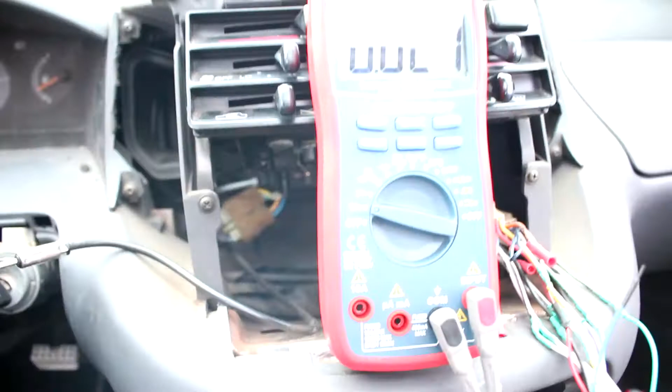Uh-oh. Look at that, voltage is still there. Okay, so I'm gonna have to go to the relays next, pull up the wiring diagrams, and we'll continue from there. Here we go.

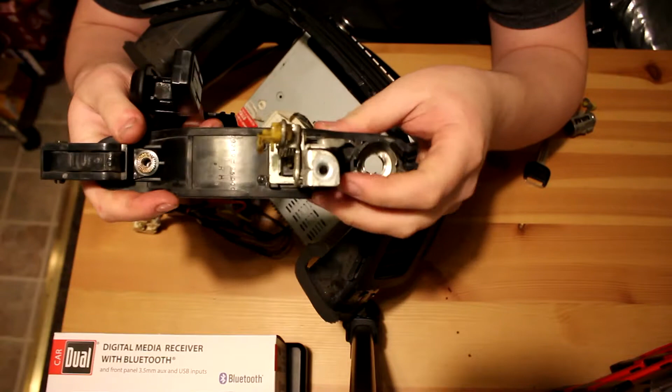So this one feels much, much better, but the problem is it doesn't fit the car. So I went ahead and pulled the new lock cylinder out of the new door handle, and I took apart the internals, watched a few Lock Picking Lawyer videos, kind of figured out how that works. I went ahead and picked the lock, the new one and the old one.

The old one kind of fell apart, but I pulled out all these pins and I've re-keyed the cylinder to the key. So now the key actually turns the cylinders. This will be a fully functional lock on the new door handle, which should be coming tomorrow. So I'll have an update on that tomorrow.

So here is the stereo unit that I soldered up last time, and that was quite an adventure. I'm gonna have to redo all of this, so I'm just gonna go ahead and chop them all off and try again. I'm not gonna make you watch the video because that would take forever and be ridiculous.

Here we are at the spaceship. I'm gonna jump this thing, get the heat going in it, and we'll put this back in. Well, that's it, I did it. I will update you once we get the door handle and other such things.

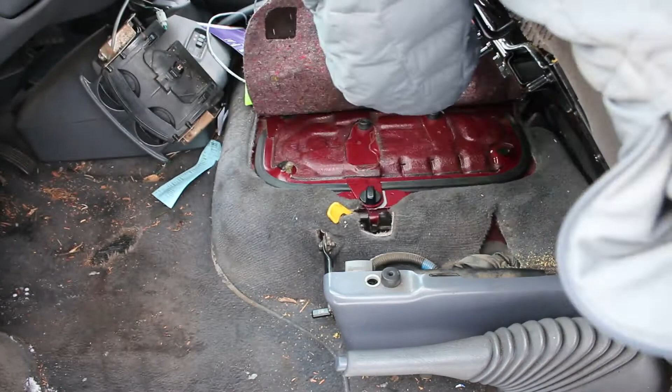Let's get focus right there. So this cable right here - you can see there's some slack on it right now. There should be no slack on that, it should be tight at all times. And as we pull the throttle cable, that should also move. So I'm gonna go ahead and pull this out.

And I'm gonna get some lube and we'll shoot it down there and see what happens. All right, so I've been at this for about, I don't know, 7-10 minutes now, and this is where we're at. It's retained some of its spring, and I got some lube down there and flushed out a bunch of crud.

So it's still not perfect. I'm probably going to go for another 5 minutes and then hook it back up. But this should be significantly better than it was. So, all right, this is where we're at now. I'm going to go ahead and... let's see.

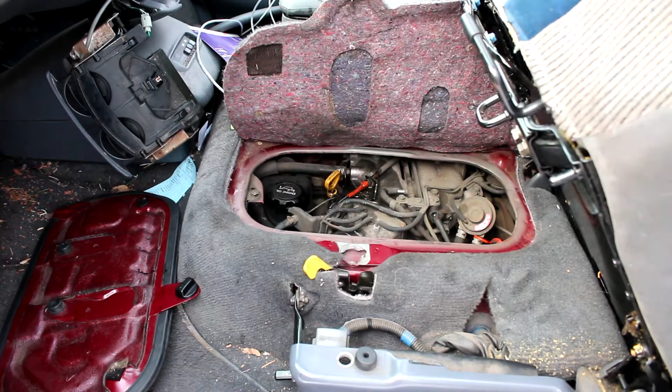So, the cable snaps back nice and quick. That's exactly what we needed it to do. I'm going to go ahead and wrap this up, and then we'll move on to the big issue of problem number 2.

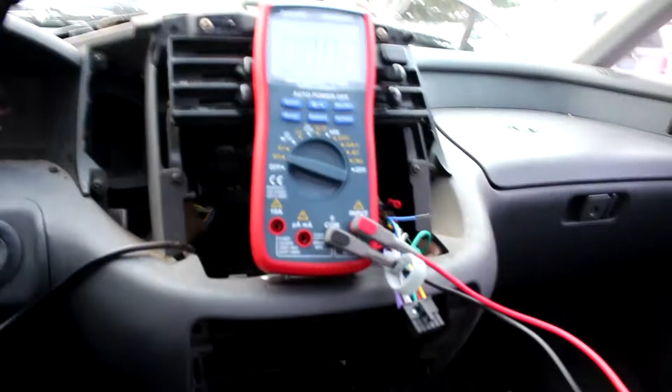Okay, so here we are in the car, and in the last video clip you watched me install the stereo, and that was interesting. The install went great, all the speakers worked, everything did what it was supposed to do, but we had a problem. After I shut the key off, the stereo stayed on. I thought, wow, that's kind of unusual.

So I started doing some thinking, and I have the diagram for the radio and the connectors and everything. I've seen on radios before where if you don't connect the ground right, the head unit will stay on, but this was doing this kind of weird power cycle thing. So I did some research, and here's what I wanted to show you.

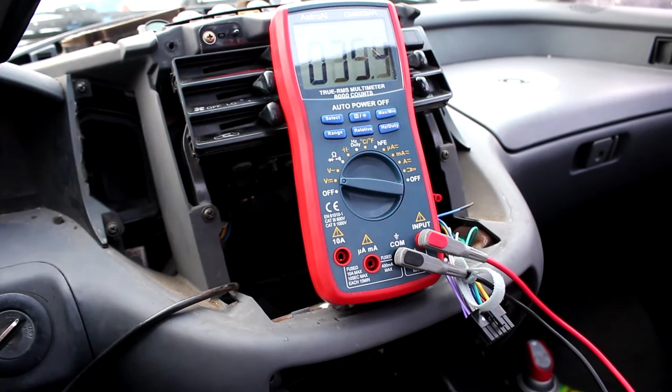Right now the car is running, and here's what we got. Let me set you up in a way that you'll be able to see this. Okay, that's going to be really dark, but I hope you can see.

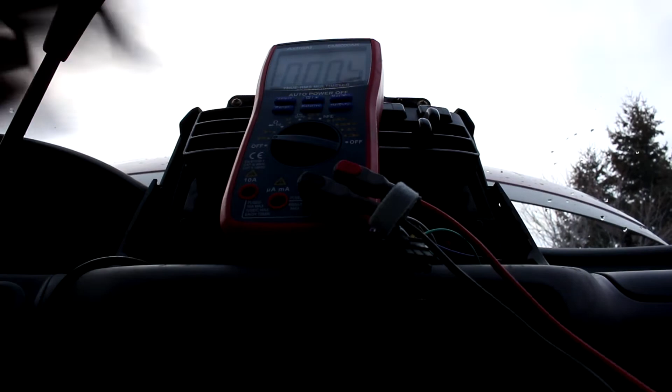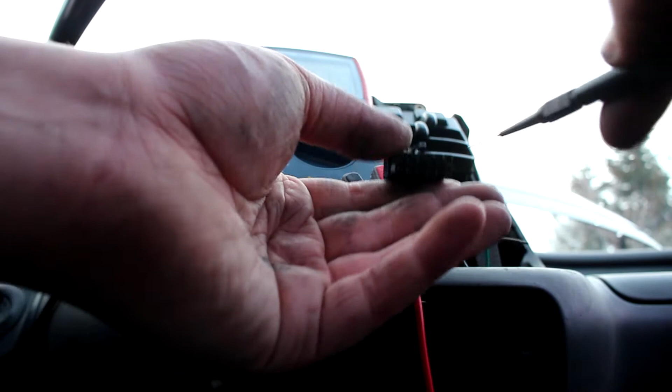So right here I've got the connector, we've got wires to the connector. I'm going to take my multimeter and set this up so that maybe you can see it, maybe you can't. I'd love to set this up right here. Okay, I'm going to put my black on the ground and my red on this yellow wire right here.

And we're reading 14.25 volts, which is excellent. That means the battery's charging. This battery has been really low, and there have been some issues, and it's just been sitting. So this is charging right now, which is why I've got the car running. So the black is our ground, and the yellow is our battery voltage, our system voltage.

The next pin is this red one here, and this is also system voltage. There's a 2-power system here. On the yellow wire, it's a constant 14 volts no matter if the car is running or not. Now this red wire is switched power. So when the car is running, the 12 volts is there telling the stereo to turn on, and when the car is not running, that 12 volts goes away.

So what happens is when the key shuts off, goes to the lock position, and is removed from the cylinder, the system voltage on the yellow wire stays there, and the system voltage on the red wire switches to 0.

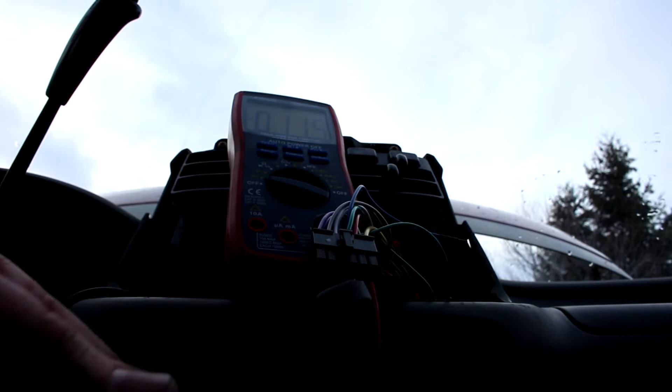So let's go ahead and test that. Let me grab my pins here, and I'll put my ground in, then my power in. Okay, we are currently reading 14.23 volts. So I'm going to shut this off.

Key is off. We're sitting at 0.625, 26, 27 volts. This will go all the way up to 0.667 volts on this red wire. I really hope you can see that—otherwise you'll just have to take my word for it.

So the problem is, that's just enough voltage to turn on the stereo. The stereo turns on, pulls this voltage down, then shuts off, but the voltage comes back. It's this whole looping cycle of the stereo kicking on and off, on and off. So we're back up to system voltage here.

So what I need to do is figure out a way to get this voltage to drop. What I did was back probe this red wire with the key off, and pull the voltage down through a test light, and that shut the stereo off.

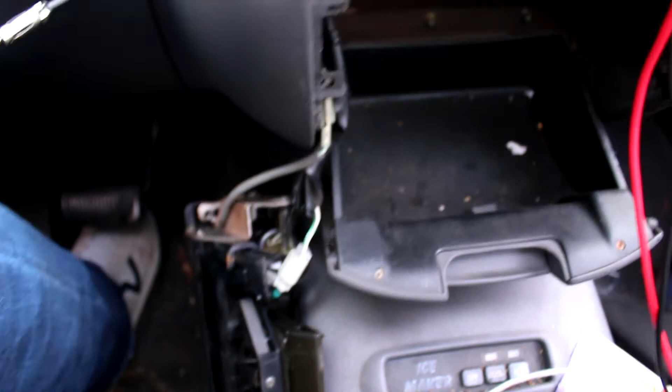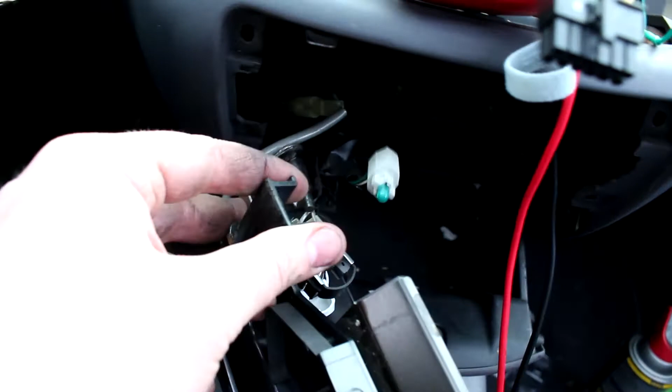So I got to thinking, well, what else is switched power? We have our cigarette lighter right down here, okay? Not this, but these connectors down here—one of those pins is switched power, and the other is a constant ground. This top pin right here is switched power. So I'm going to chase this wiring diagram, and I think what we're going to find—this is an assumption, we're going to have to prove this.

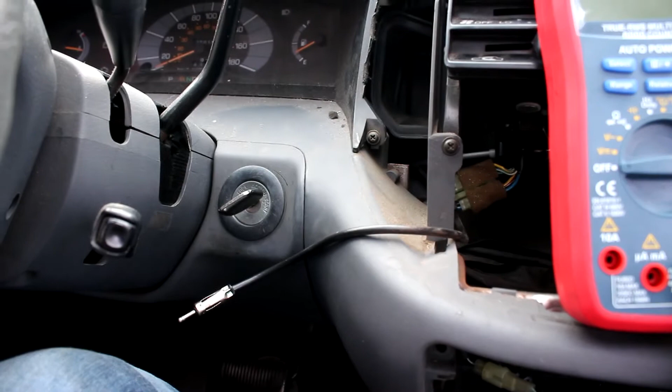My guess is that this ignition switch is not releasing the contact all the way, and we are receiving extra voltage on our system here. So the next step is going to be for me to pull this knee panel. It's really not that bad, there's some screws on the bottom and just some clips on the top. I'm going to go ahead and do that, and then I'll get back to you.

All right, so here's the plan. I am going to measure voltage here at this connector. I'm going to shut the key off, measure the voltage, and I have the column down here. It's pretty easy, just 2 screws, and you're going to pull down this under trim panel to get to this connector. This connector goes to a bunch of things, but most importantly it goes to this ignition switch. When I pull this connector, we're going to see if that voltage stays.

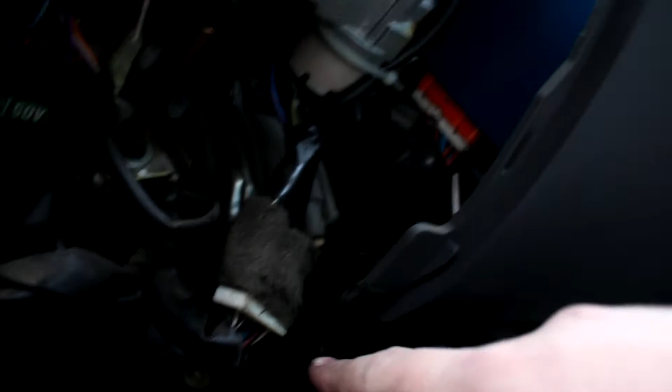If it does stay, the next thing we're going to go to is the relay that controls the system. We're going to see what's going on. I've got some wiring diagrams that I can look at after this. So we're going to pull that and we'll see what happens. I'll update you once we get there.

Uh-oh, look at that. Voltage is still there. So I'm going to have to go to the relays next, pull up the wiring diagrams, and we'll continue from there.

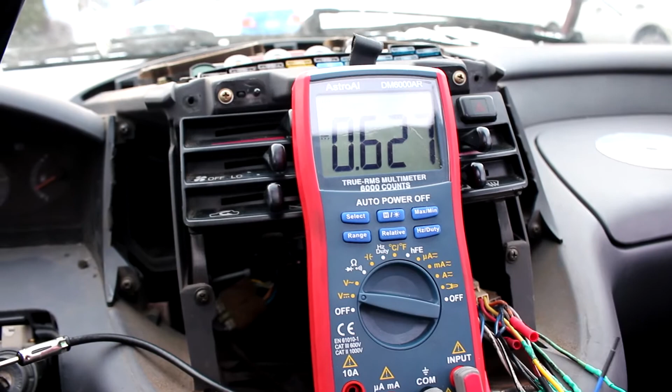Here we go. Here's what I've discovered. So we have one end of our meter on ground here, and we have our other lead here. So when we test this pin, we have 0.621.

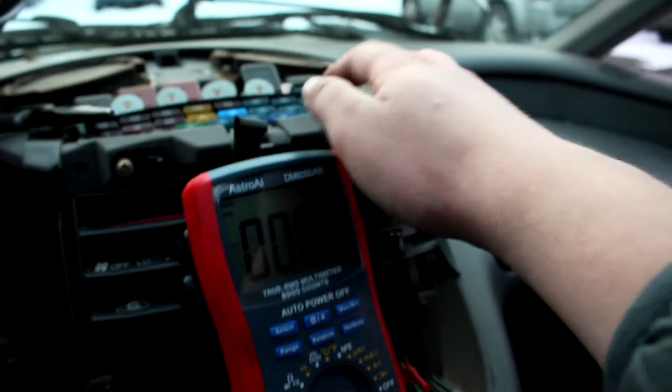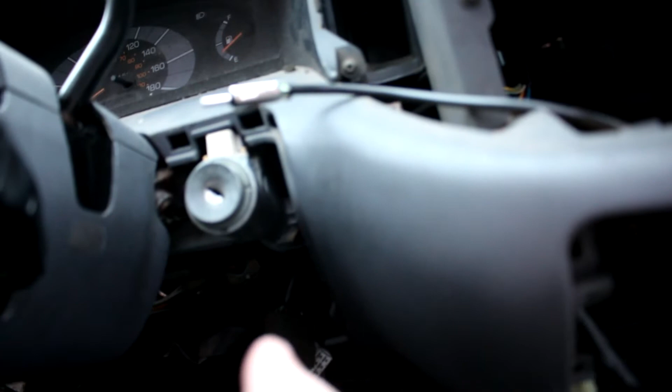So what's happening is this wire here, which is blue with red, I hope you can see this. This wire here, blue with red, powers up our 7.5 amp radio and our 15 amp cigarette lighter fuse. If I pull either of those, this is the cigarette lighter fuse here, and our 7.5 amp is right there. If I pull either of those, our draw goes to 0. But if I unplug our ignition switch, the draw does not go to 0, and I just showed you that.

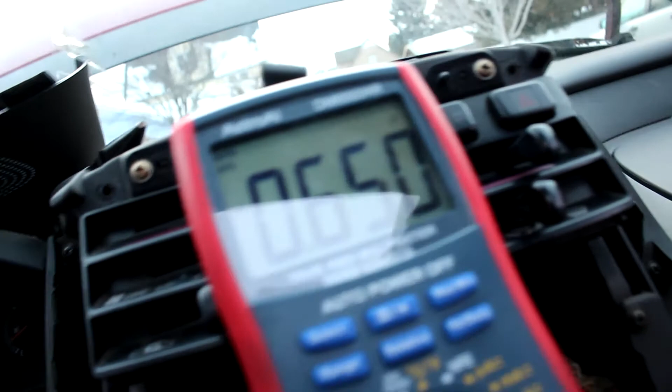So what I did was I checked this voltage. After unplugging our ignition switch, I checked the voltage on this blue with red wire, and if I go down there and find the pin, there's our draw. 0.650, 0.650. So what does that mean?

Well, what I need to do is figure out if this is the only feed for this wire. It should be, and if it is, my hypothesis is that somewhere along this line there is a short to power somewhere, or something is backfeeding the circuit. So I need to figure out exactly all what's on this, and in order to do that, I'm going to need to get access to the AllData. So I will do that, and we'll come back once we figure that out.

All right, so here's what I found. We're on the AllData here, and on this, which one is it? One of these diagrams. Maybe it's one of the ones I already got pulled up. Okay, so this is also from AllData.

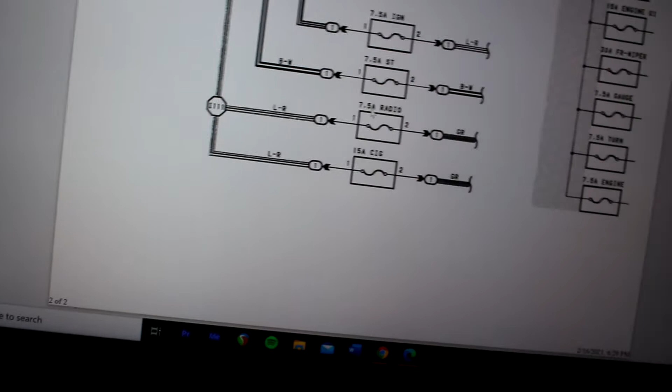This connector here, I'm looking for I111, which feeds the 7.5 amp radio fuse and the 15 amp cigarette lighter fuse. When I pull both of those, the voltage goes down to 0. So what I'm going to do is look for that connector. Now I went to AllData here, not that one, here, and I started looking at the connectors. Bam, here we go. So you can look here, and right here we have I111, which is way down there, and that is the closest looking connector that I can see.

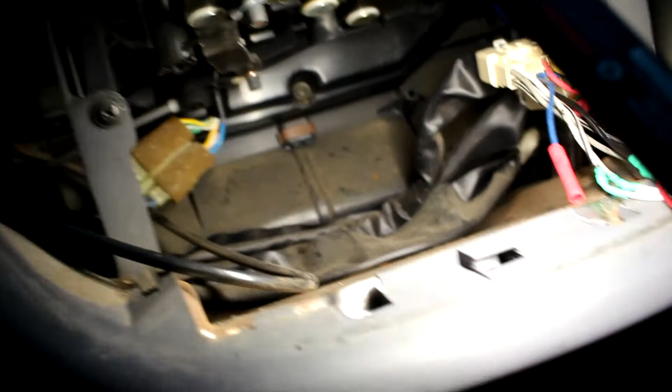So what I'm going to do is shine my light down into this hole here, and I'm going to follow this harness until we get to a connector. I'm going to split the circuit in half, and that should help us figure out where we're going, right? That's what Eric O says. He says split the circuit in half.

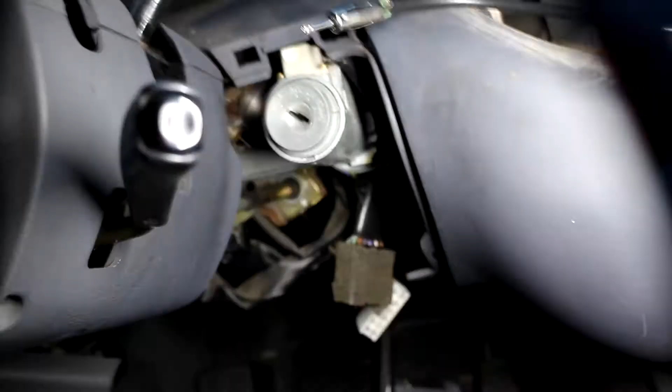So that's what I'm going to try to do. Somewhere between that white connector there and somewhere else in this system is feeding voltage. So let's figure that out.

I thought of a test I can do without pulling everything apart and losing my mind, because tracing down these harnesses is not as easy as I hoped it would be.

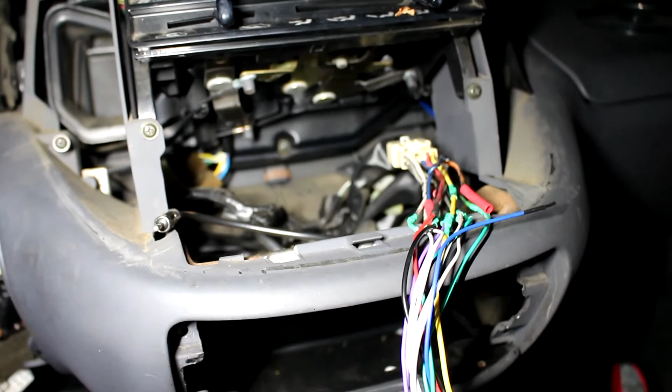So here's our fuse block up here for the inside, and there are two fuses that we can observe the draw on.

Let me grab my meter here. I'm gonna put this up here so you can see it, get everything set up for you. I gotta back probe the bottom here. Okay, so we've got a good ground.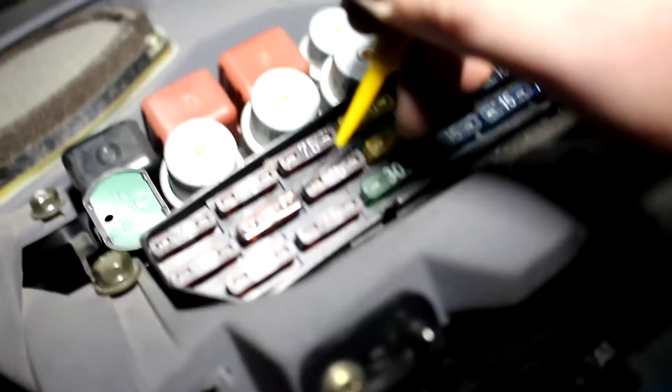So the first fuse right here that we can observe it on is this 7.5, which is the radio fuse. There it is on one side, there it is on the other side.

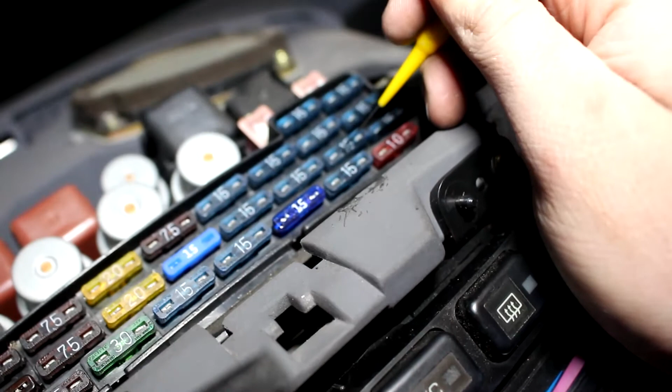Okay, the second fuse is this 15 amp cigarette lighter right here. There's one side, the draw is there. You're just gonna have to trust me. There's the other side, the draw is there.

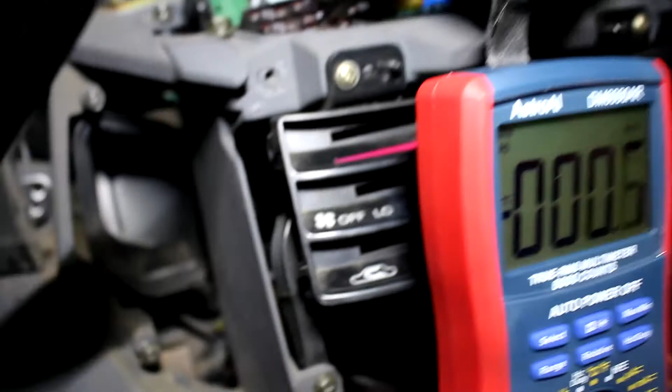Okay, here's a cool test. Let's pull the 7.5 amp stereo fuse and see what side of the fuse is still on. Here's the outgoing side, nothing. The ingoing side, aha, there's the draw. So we know the draw is on the right side of this fuse.

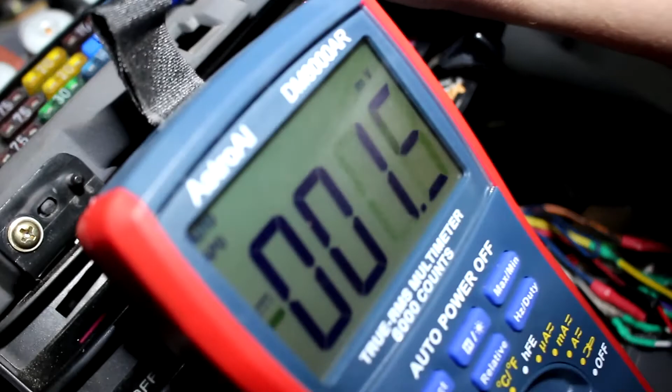Now, while leaving that pulled out, let's go over here to this 15 amp. We're gonna pull that. I'm gonna take my tester, let's test this side. There's the draw. No draw. No draw. Okay, so we know that on this side of the cigarette lighter is the draw, without a doubt.

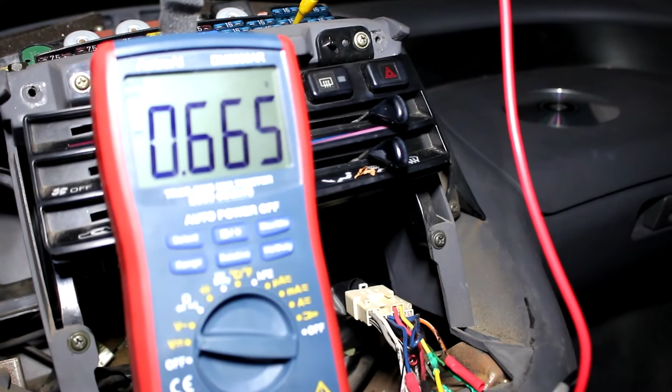So we know it's on this side of the fuse, so let's go to the diagram for the cigarette lighter. Okay, so the cigarette lighter shares this power from the blue with red wire at the ignition. So my guess is something is backfeeding from this cigarette lighter to this 7.5 amp.

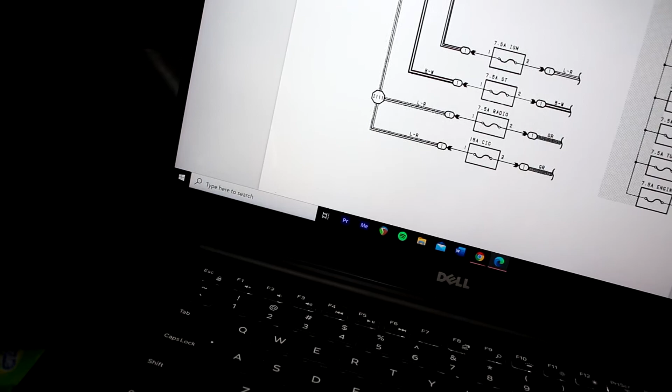We can test that by going down here to the connector, once I replace my ground. Okay, I'm gonna go back down here to this connector where we saw the draw originally. It's not there. And if I put that fuse back in, I'm gonna leave that pin there, put this fuse back in, and we just watch that draw come right back.

So that is excellent. So what does that mean? That means that between our block up here, so actually that means this: from here to the cigarette lighter, we are getting a voltage somewhere. So something in the cigarette lighter is backfeeding.

Check it out. So I've got the fuse pulled up there. We've got our draw up there, we know that for a fact. Now I've got my ground pin right there. I'm gonna take my probe here and stick this into the power side of this cigarette lighter. Uh-oh. 0.665 volts. So what does that tell us?

There is some sort of short between here and there. And we are getting an extra half a volt from somewhere.

So what are my options realistically? I would love to take that out, run a new wire down to there, bypass the whole thing, and call it a day. Now I could depin that and do that as a proof of concept. That would be a good idea. I would love to also follow this harness all the way back to wherever it comes from, but there is so much stuff.

I could not, for the life of me, through ALLDATA, find out the best place to split the circuit in half. So I pulled both of these fuses and checked, and one pin over here had the 0.667 or 0.7 volt draw on it when the car is running. So what that tells us is that it's not a power side issue. There is some sort of backfeed or short to power in the system somewhere.

So the next immediate spot that I went was down below. I back probed the wire, and it comes in on a blue with red. I'll show you on the wiring diagram. It comes in on a blue with red in the back, and it leaves on a white, which according to the wiring diagram is a green, but it's actually a white in this car.

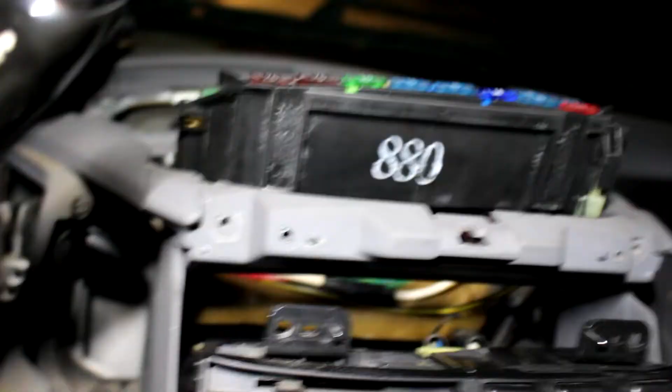So it leaves on the white and goes into this giant harness way back in there. You can kind of see it right in there, and it's a total pain in the butt to get to.

I followed that down, did a bunch of research, and did some more testing. I was thinking maybe I could just run a wire to the cigarette lighter to get that to work. Problem number one with that theory: there are other things on the circuit besides the cigarette lighter. I know this because I looked at the wiring diagrams, and there's some sort of airbag system on the circuit, and the power mirrors are also on the circuit.

So what did I do? I unplugged the switch and started taking a look at that. My multimeter just turned off. I started checking all those pins. I tested all of them and found the draw on this bottom pin right here, and I'll show that to you.

All right, so here's my connector. I'm gonna go ahead and put it in this bottom pin here. Come on, this is so hard to do one-handed. You YouTubers are talented. Okay, all right, so that's in.

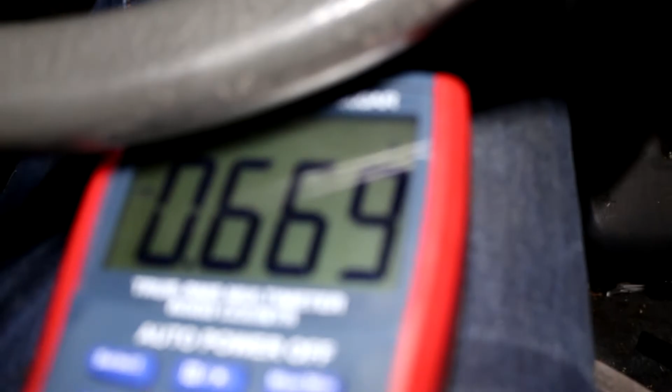And I'm missing my ground, of course, so I gotta get that back in over here. Pow, okay, here it is—0.669 right now with the car running.

So what's the next step? Well, our draw—sorry, I'm fiddling around with my ground here—our draw is up there and it's also down here. So what does that tell us? That tells us that somewhere in between those two points is our problem, okay?

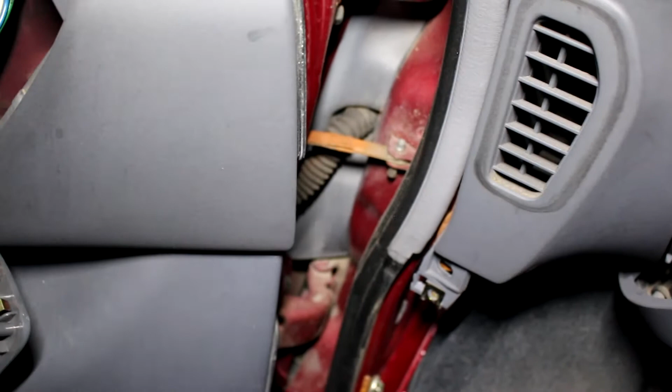So I'm trying to find a connector. I found a connector called BJ1, block junction 1 I think, but it is the connection that follows the door flex inside the car in this hole, and is right below this tweeter. To get to it you have to pull the ductwork, pull this trim panel, and pull this lower column, and there's two connectors down there.

Let me see if I can get you in here. Okay, come on. I'm seeing the unplugged connector—there it is. See that one that's plugged up right there? That is BJ1. And somewhere on there is a red with white wire that comes out of that.

So what does that tell us? I unplugged that connector and I'm going to show you something miraculous. All right, let me set up our draw up here. Okay, we're on the right wire there. I'm gonna take my ground and set the meter up here, and set my ground up right here.

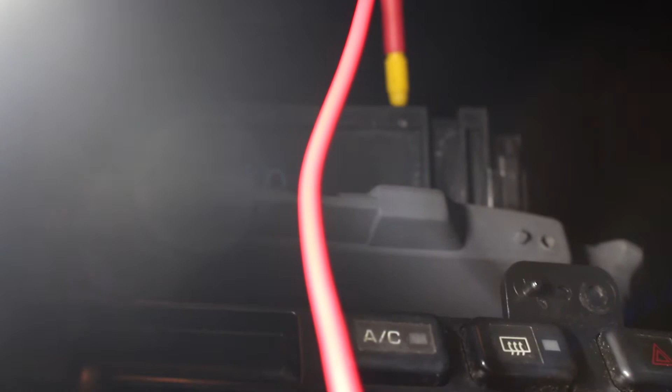Okay, here we are—0.669. Bam. Proof. There we go.

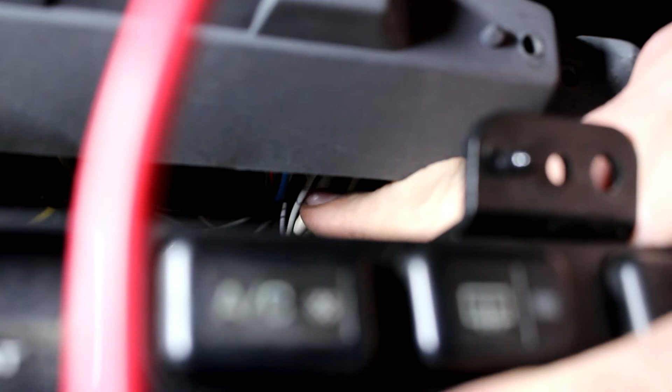So that is on this tiny little wire, right? Probably can't see it—right here. Boink, hello. So that wire comes out, goes into that huge mess, comes down and around.

So I came over here, and as soon as I started pulling all of this trim over here, I noticed something really interesting. Uh-oh, it's wet. Focus, come on, right here. Uh-oh, it's wet—see that?

I followed that up into here. I'm gonna point you at a place where you can see this, hopefully.

Sorry, this is... I don't work in Hollywood, I wish I did. Sometimes.

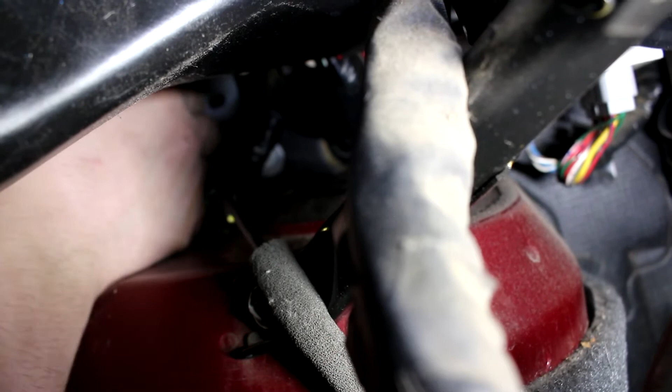Okay, let's get you so you can see it. Okay, you can see that connector right up there. I'm gonna squeeze my hand back up in here. There's a tab on the back, and you gotta push up a little bit to release the pressure, and pull that tab down.

Okay, there's our connector. We just lost dome lights, okay? We just lost the dome lights, but look at the meter—29 millivolts, 30 millivolts. That's acceptable.

I did it. Okay, so what does this mean? So there's the white wire coming in, and there is the red with white coming out. So you might think, oh, well, obviously the short is occurring over here.

So I put my meter on here. I will prove that to you. Here's my test lead, come on. Okay, here's my test. Okay, it's in the hole, it's in the pin. Here's my meter—20 millivolts, 30 millivolts. So there's no short here.

There's no short from that connector back. What does that mean? That means the short is inside that connector. That is crazy. And you know what's even worse? I don't see a single green crusty—I'm not seeing any issues at all.

Come on camera, adjust. Okay, hold on. Boop, it's too bright, let me dim my light here.

Yeah, you're not going to be able to see that. I hope you can. There is zero corrosion in that, but there is water in that connector, and that water is shorting out that connector.

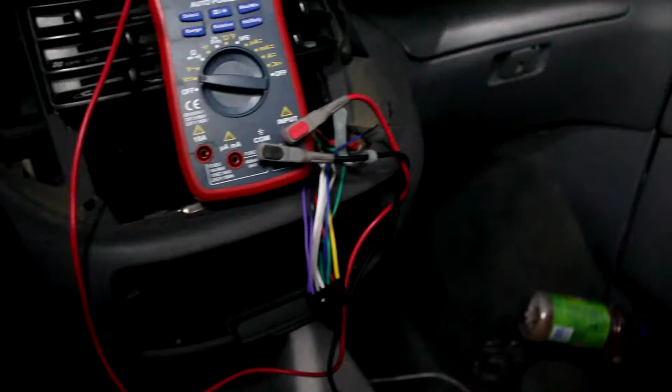All right, everybody, quick update. I was wrong, and I have never been so happy to be wrong. So here's what I was thinking: I thought green crusties in the connector. Uh-oh, not good, there's wetness down there, right? Well, I inspect, there's no green crusties. I brush everything out, clean it off, spray some fluid in there. Everything works pretty well, pin fitment seems really good.

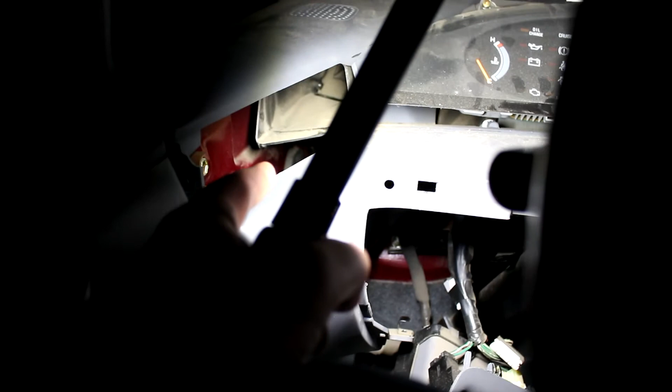Everything seems great, so I go check the diagrams again. I'm like, what in the world? I thought that was BJ1. Well, turns out I was wrong. That is, what do they call it, I4 or something like that.

So here, I lost my ground here. So let me go ahead and get my ground again. It's not the most reliable, but you know what, it's gonna work for this project, so, till I can buy a power probe extension.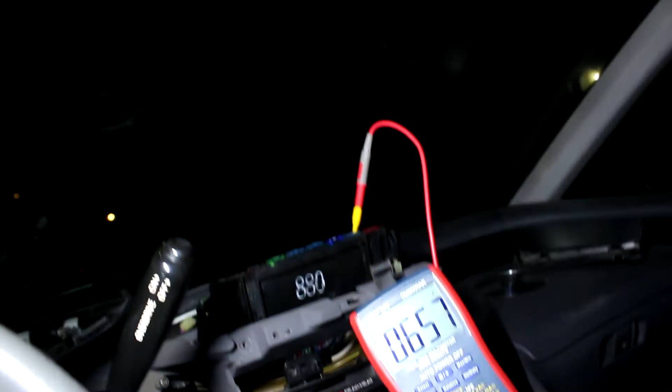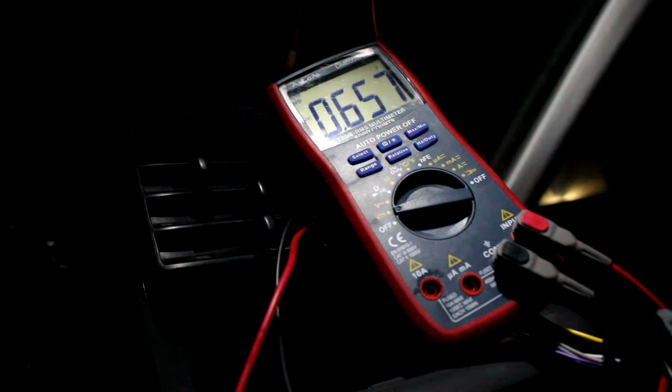Here it is, I'm gonna unplug this connector. Okay, you're good, you can see that, I hope. I'll kind of hold you there with my leg, the leg cam. And here goes the connector. Almost. Look at that. Unplugged, way up there, look at that. That is unbelievable, that is something else.

So I don't know if I want to pull the clock and see if I can figure out why it's shorting in there. That is just crazy to me. So maybe I'll pull the clock, and maybe I'll use that as Ivan says, some bonus footage.

I am not done with this van. I am done with it for the night, but we have a few other issues. I've got the back passenger door, the door light kind of intermittently comes on and off, so that's going to be a whole nother adventure. I've still got to put all this back together. I probably won't bring you along for that because it's just so much stuff, there's just trim pieces everywhere. So anyway, thank you for watching this far, and I will update you when we get to the next part. I am so glad to finally figure out what it is. Thanks for watching.

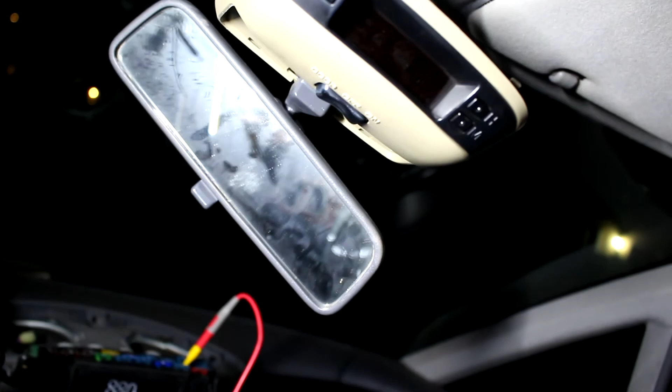Okay, so this video is going to be to talk about exactly what was going on with my voltage issue that I had on my circuits. So I started off and I needed some diagrams, and I couldn't find them through ALLDATA DIY, which is what I use because I don't work enough on cars to justify the regular ALLDATA pricing yet, but I'm sure I will in the future.

That being said, I reached out to Ivan from Pine Hollow Auto Diagnostics, and he hooked me up with some awesome diagrams, which I'm super thankful for. Turns out it does have the vehicle, and I was able to find it, which was awesome. It just took me a little digging.

So we'll start with the diagrams that Ivan sent me, and we were having that extra voltage on the stereo, keeping it on, right? So if we go over here to electrical diagrams, I'm going to click on this, and we're going to do power source right here. And here's the first diagram that I started looking at when Ivan sent me the documents. So we've got our battery coming in up here, and that comes around, and through fuses it feeds our ignition switch right here.

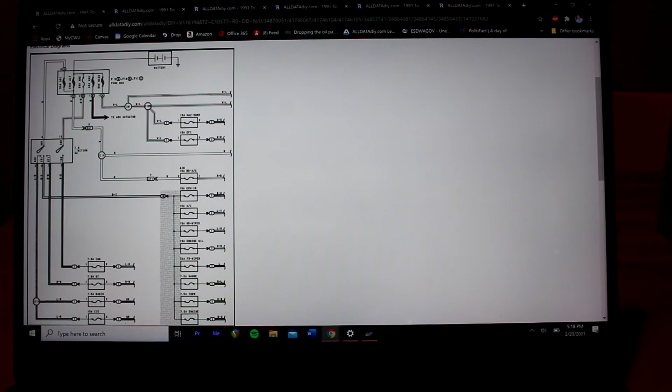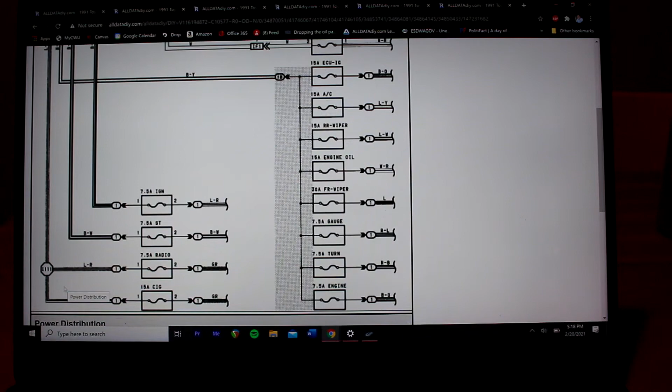Let's see if I can zoom in on this for you. It feeds our ignition switch right here, and I was looking at this accessory line, this blue with red wire that comes down, feeds our 7.5 amp radio and our 15 amp cigarette that goes to ground. So we don't need the rest of this diagram right now. So I initially found the voltage on both of these and wanted to find this I111. Well, after about 45 minutes of digging, I discovered that I couldn't find I111 because it doesn't exist anywhere else on ALLDATA.

Okay, so after not finding what I needed here, I decided to start looking up some other diagrams, and I've got them pulled up. After discovering which side of the fuse the voltage was on, I figured out it was back feeding instead of something being left on this blue with red wire. So I followed this down to this fuse here. I pulled both of these fuses and figured out that from here onward to the rest of everything else is where that voltage was sitting.

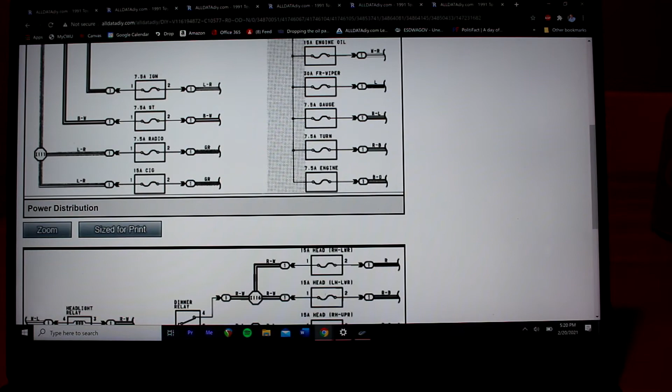So I went through and pulled every diagram I could find. Here's one, this is for the mirrors. We have our 15 amp cigarette lighter fuse that comes down into this J4 junction, which goes into this connector BJ1, which then goes into all of this stuff.

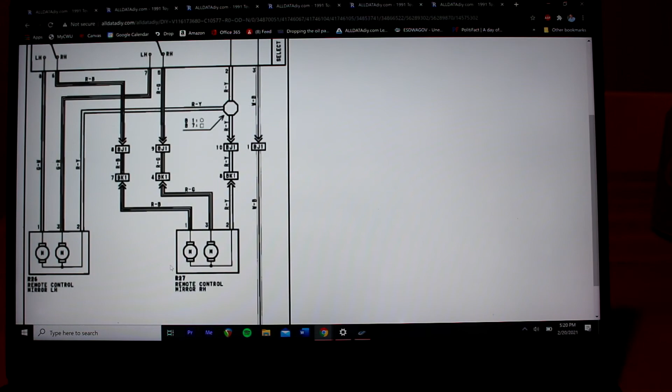So I thought, okay, I can find this J4 junction. But I had a really hard time finding this. If you look at this diagram, we've got BK1, BK2, we've got BJ1. I thought, maybe that's J4, maybe there's a BJ4. Nope, that's not there, it's not here. I was just super frustrated.

So I went through and found all these diagrams. I found this one and thought, okay, so this controls the mirrors, we need to have that. This one here controls a couple things.

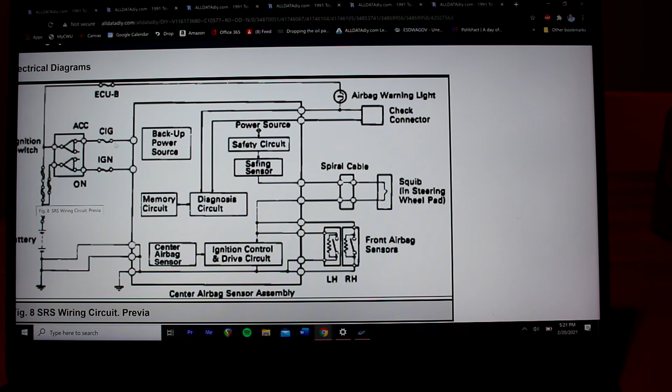So here's J1, junction 1. Here's that cigarette lighter fuse that comes down, feeds part of the clock for the turn on. It also feeds the cigarette lighter. And here's J1 again, then it goes to ground. So it also feeds here, we have our cigarette lighter fuse here, it also feeds some sort of airbag backup power supply, which is what this says here. I wasn't too worried about that, there were no issues with that fuse out, so I'm going to close that.

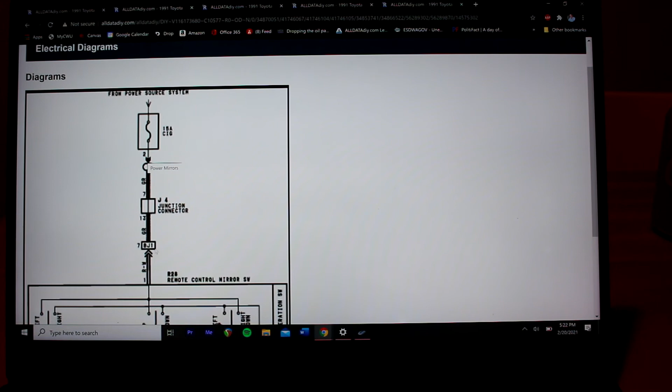So I started looking for these J connectors, and in the process found BJ1 and BJ2, and I thought, well that looks familiar. Right here we have BJ1, this BJ1 connector, right here. So I found that connector and thought, okay, here's the door flex. I can follow that in because the mirror connector is in the door, and I could find the voltage on that connector, so I can follow that in.

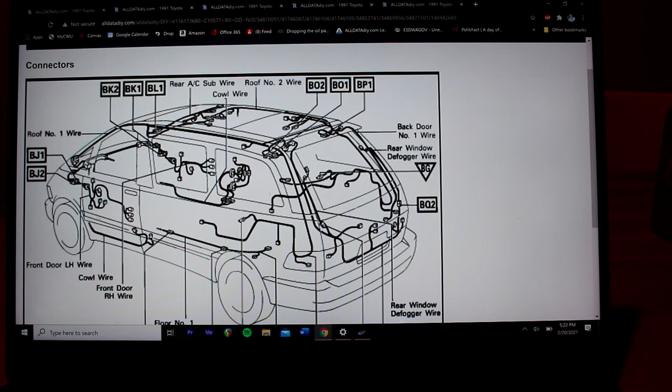So I got to this connector, or what I thought was this connector. I unplugged it, and it went away. Turns out the connector I found isn't actually BJ1, the connector I found is ID1. And ID1, according to this diagram, goes up and feeds something else.

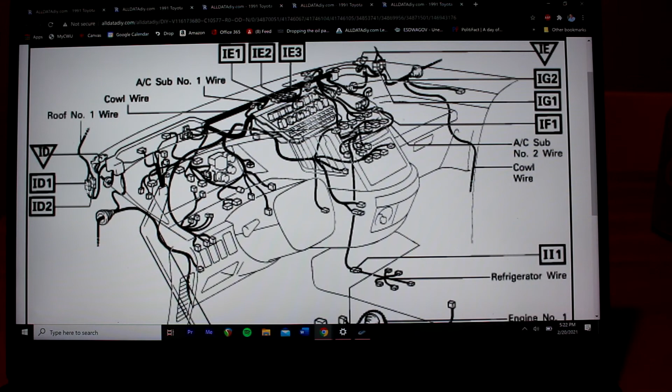So when I unplugged this, the draw went away. Well, what happens is it comes around here to the fuse, right? It comes in here, but then it also comes out and through the door flex. So when I unplugged this, it was cutting that voltage, but the reason it was doing that is because this goes up and feeds the clock. And the clock was the culprit.

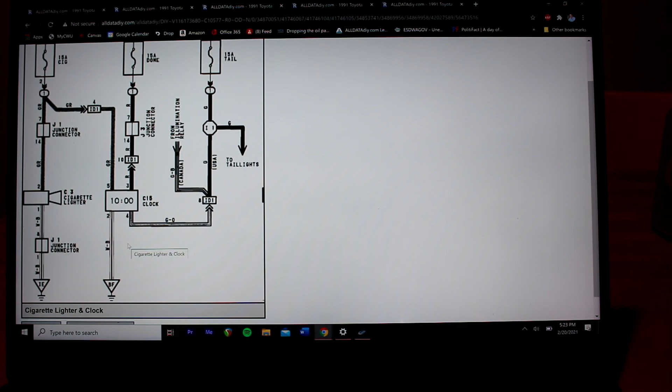So I unplugged the clock. It definitely needs a new clock, but I'm probably not going to order one. It didn't work anyway, and it's an old car, so I'm just going to let it go. I'll probably use some of these screencasts up on the screen for the video, and just wanted to give you an update.